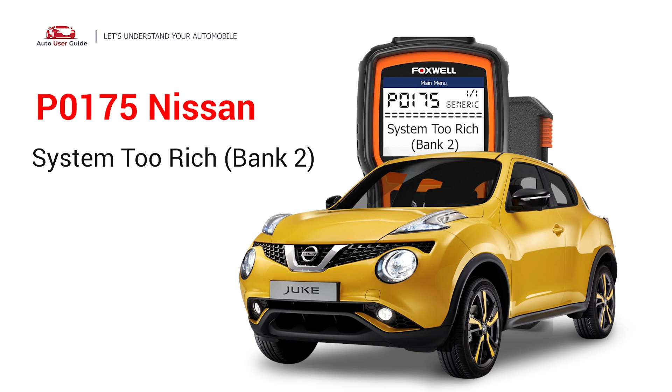This means the PCM has detected an air-fuel mixture with too much fuel and not enough air in the engine's bank 2, typically the side opposite cylinder number 1 in a V-type engine. Under this circumstance, short-distance driving is permitted, but your vehicle should be repaired as soon as possible.

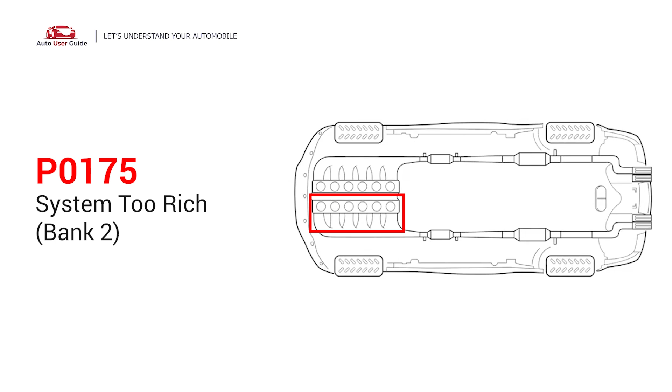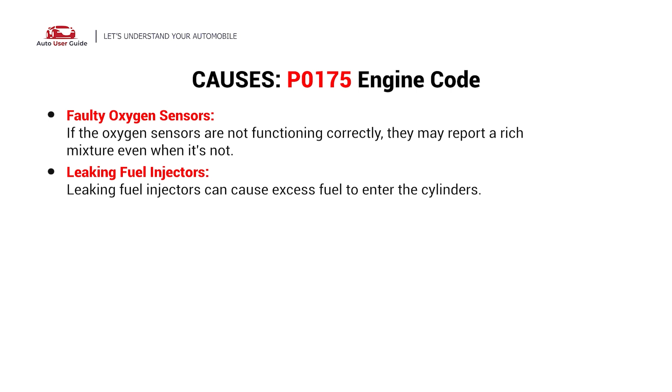So what causes this imbalance? Here are the most common culprits: faulty oxygen sensors, leaking fuel injectors, vacuum leaks, fuel pressure problems, mass airflow sensor issues, and a clogged air filter.

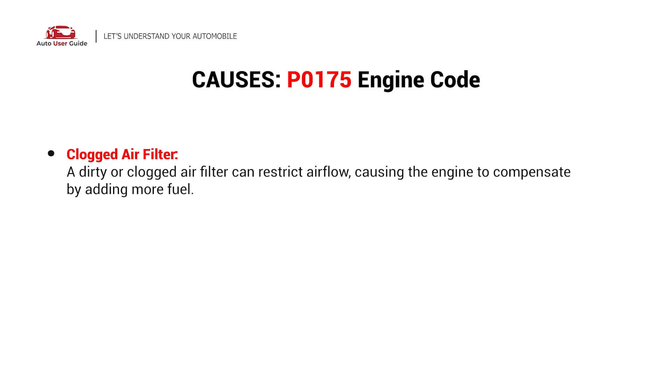Ignition misfires. Here are 3 simple DIY methods you can try to solve this problem, starting with oxygen sensor replacement.

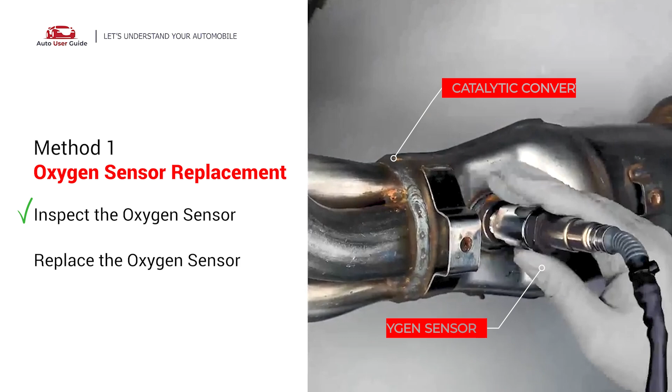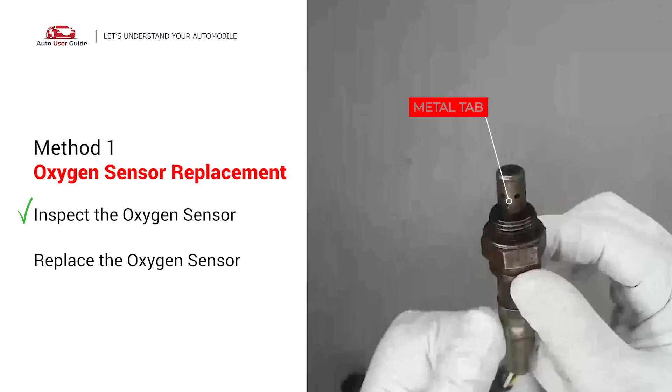Carefully remove the oxygen sensor from the catalytic converter and visually check the oxygen sensor electrical connections, wire harness, and metal tabs for any damage. If damage is found, replace the oxygen sensor.

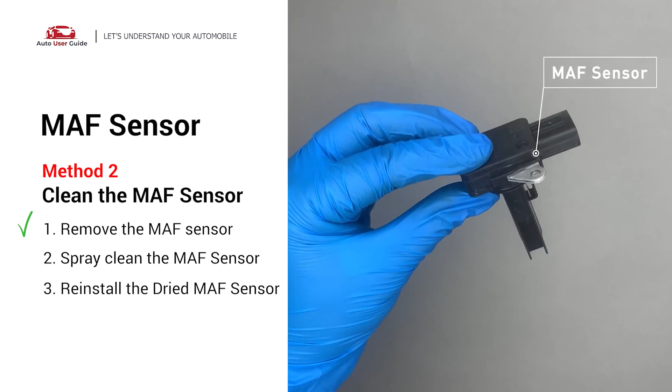MAF sensor: carefully remove the MAF sensor from your car and do a quick inspection around the wire. The inside often gets dirty and needs to be cleaned. You can spray the MAF sensor cleaner onto the wire perpendicular to the ground so it won't damage the sensor. Reinstall the MAF sensor back in the car after it dries.

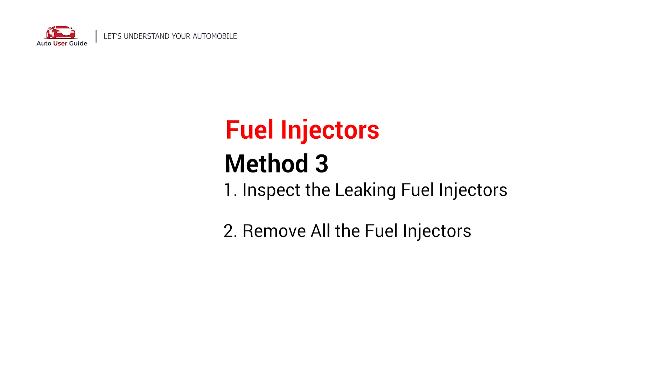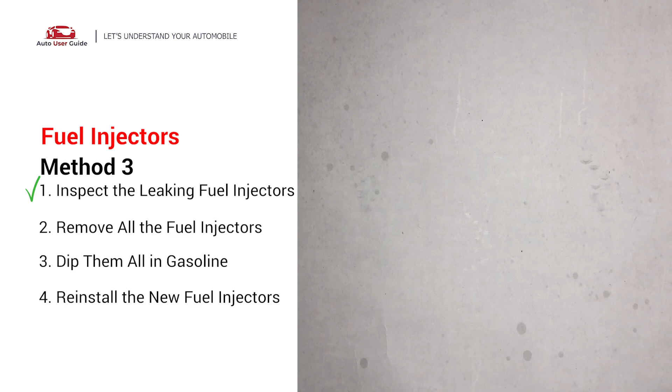Fuel injectors: the fuel injectors are mounted in the intake manifold so they spray fuel directly at the intake valves. Inspect the fuel injectors on the fuel rail for leaks.

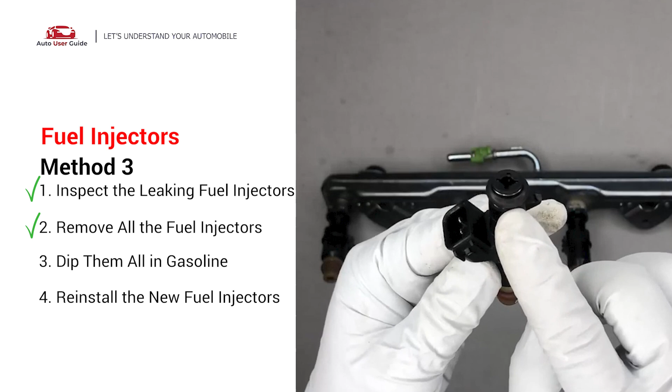Carefully remove the fuel injector. Make sure the new injector has new seals and never reuse the old seals. When you change the fuel injectors, change them all as a set, otherwise the engine will run unevenly.

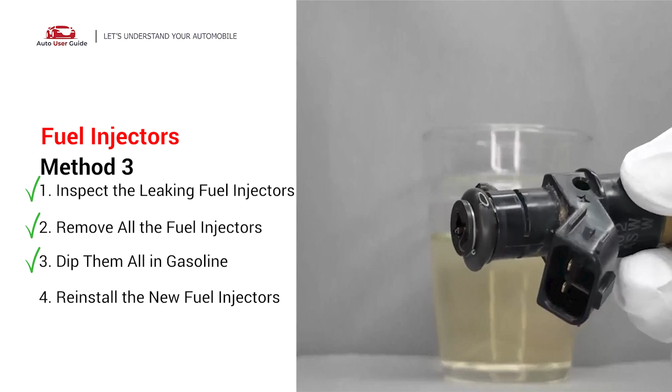To prevent leaking, get some gasoline, put it in a cup, and dip the new fuel injector into it so the seals get wet with gasoline and it will go in without leaking. After that, just slide all the new fuel injectors in.